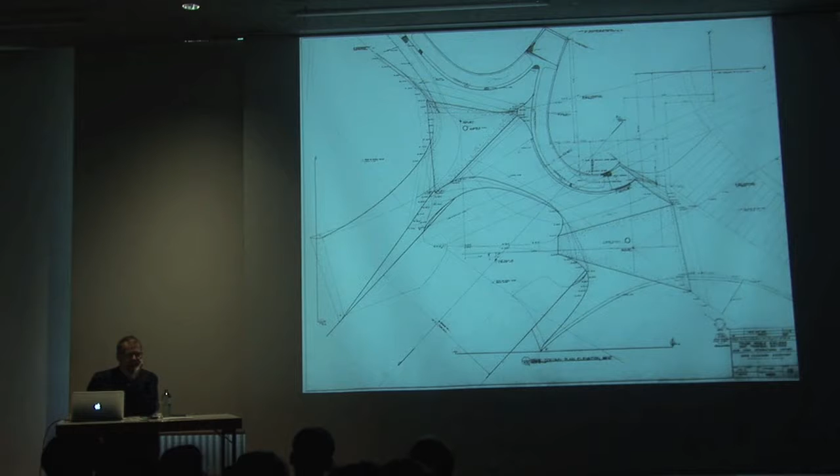So I look at things like this, a drawing by Saarinen and Saarinen's office, and I look at buildings like this and realize this was built the year I was born, all by hand. The drawings that made this building, and the things that went into it, were all drawn by hand. This is very much the world I envisioned myself becoming part of when I was a kid thinking about being an architect.

I'm absolutely gobsmacked—amazed. I don't know how the word gobsmacked translates into German, but just to think that, if you look at the work of Zaha Hadid's office right now, the forms coming out of that office are not too dissimilar to these forms. And the technologies they're using to make them, we're barely getting our heads around. Yet these forms were built in the mid-60s by hand.

Making an entirely different point. But at the same time, I really admired the skill in that.

This building by Toyo, a collaboration between Toyo Ito and Cecil Balmond, is regarded as one of the first digitally fabricated scripted buildings. It was one of the Serpentine pavilions built in London around the turn of the millennium, just before. It claimed to be this great turning point in architecture, that an algorithmic script could be the source of the information that defines the design.

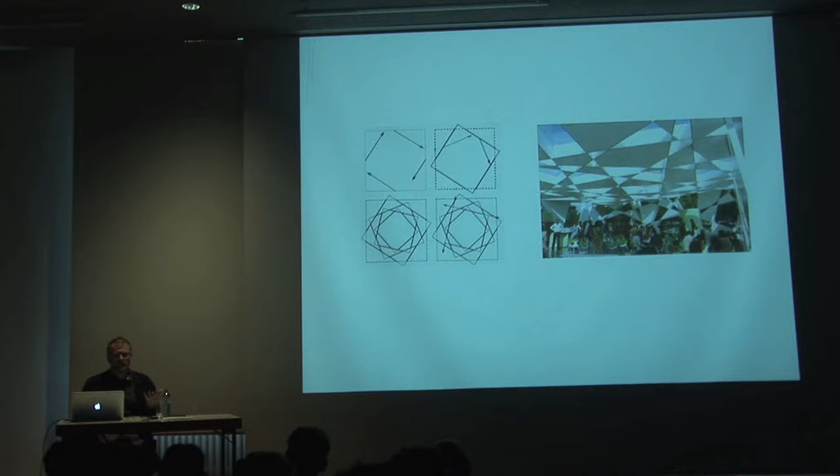That's a conversation which has clearly gathered a lot of momentum, and there's a lot more that's been said about it now. But when I went to look at that building, this is what I saw: it was an analog-made building pretending to be a digitally fabricated one. I know they weren't making explicit claims it was digitally fabricated, but it's very interesting to me as a building. It claimed to be one of the first digitally fabricated buildings, and yet actually it was analog.

I think there's an awful lot going on in architecture always between who's actually on the money, so to speak, between the ideas going into the design and the ideas of how they might be made. Sometimes you're ahead on design, sometimes ahead on making. But I looked at that building and just saw huge mastic joints, square cut steel, all these things that were just part of a mass production industry.

So I've always been interested in the relationship we as designers have with the tools we use to make architecture. Of course, we all know that architects don't make buildings, they make information that makes buildings. But the interesting thing is that simple statement is getting harder and harder to keep contained now. That statement is beginning to bleed apart.

These tools here are in the RIBA drawings collection in London. They're 2,500 years old, and because they're in the collection, they're Roman. It's implied that this is part of the lexicon of what architectural practice is about. These are the tools I had when I was a first-year student, so things didn't really travel very far in 2,500 years in terms of what we used ourselves to produce the things we produce, which is information for buildings to be made.

But what's absolutely revolutionary is what we have today. What we have today is a completely different tool set, which blurs the boundaries between the source of where the information comes from, how it travels into the world of production, how it comes out of that world into the world of prototyping, back into production or design or whatever. It's this fluid set of loops, within simple statements like 'file to factory' that came up to imply we now had this jet stream world between design and fabrication.

I think 'file to factory' is an unhelpful term. I'm much more interested in the cycle, it's a continuous loop. Phil Ayres, Dr. Phil Ayres, who's at the Royal Danish Academy of Fine Arts in Copenhagen, has written a wonderful book called Persistent Modelling. I think it's a very nice idea to think that design is a perpetual form of modeling. We're constantly modeling: the building's a model, the design's a model, the prototype's a model, the next building is a model, and it's this perpetual process.

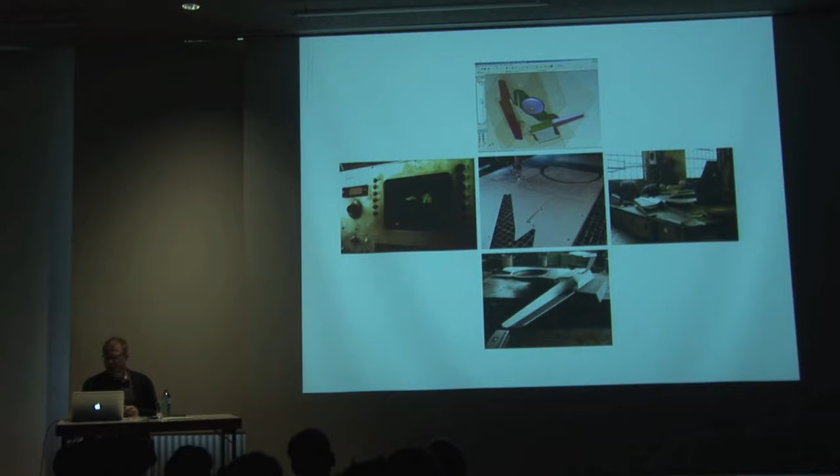I'm fascinated by the way in which the information we use to make representational tools like this is the same information we use to make the full-scale thing.

So this is a structure designed between Tom Heatherwick and Ron Packman, which failed, of course. It was called B of the Bang. There was a big row after it started to fail over who was to blame for the failures, and the manufacturer got the blame for using the wrong steel.

But the thing I like about this image is, looking ahead, I'm really intrigued as to who's that person in the middle of the image. Our relationship with industry is changing, and the type of people populating industry is changing.

One of the things I think will come out of our discipline in the next couple of decades is that we will be inventing 21st century trades. We will be rethinking at a very different level how to educate and develop a population of professionals who can weld, who can do woodwork, who can run the script, who can do what Cecil Balmond does, who can do what Toyo Ito does, and who can organize the delivery of the project. I think there is a very big future ahead of us in this world between manufacturing and design.

So I look upon these kinds of worlds now. This is the factory where we made 5502, where Nick runs his business. To me, it's like a huge drawing board, particularly because of the digital age. I would have used that metaphor maybe 20 years ago as well, but it would have been just a metaphor. I think actually now it really is a drawing board.

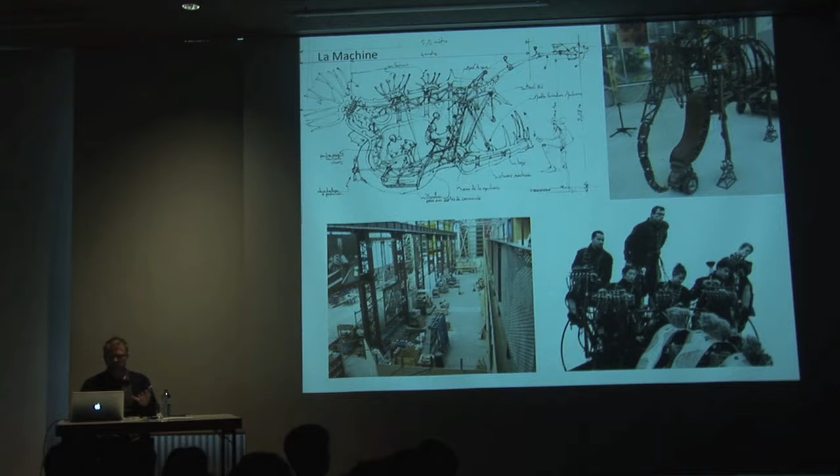So what they've done with La Machine is present themselves as an organization of artists and street performers who also are makers, but they're making the process of making a performance too, which I think is inseparable from this conversation, moving between these domains. And I love that. I think it's great.

I think the other thing, of course, is things like motion capture, in which we impose one reality over another. That's something to think about. And then 3D scanning, which has really preoccupied me in recent years as a provocation to this business of architects making information, not buildings.

So one of the questions that came up this afternoon before this talk was how do my students influence my work? Well, the first thing I should say is everything I do is collaborative, so I don't work on my own anyway in the first instance.

So I work in a group called 16 Makers. That's what we were called when we started. We're not a practice—we're a group of people who come together for certain projects, which are predominantly now research projects. This was the name we came up with when we were students, and we stuck with it. But the point is, we're collaborative.

None of us really ever goes out there and claims solo authorship of anything. Unit 23, which is the studio I'm not teaching at the moment because of my new job at the school, but the unit has always been interested in design and the place of production.

We'll run through a couple of short projects here just to give a bit of context, then I'll move on. This one here is a project by a fifth-year student from Reykjavik, Birger Johnson, known as Biggie. He did some research that revealed...

A lot of these are clearly hypothetical scenarios. Waiting for Requiem was a project by Michelle Young, anticipating the return of the space shuttle to Earth as America's ultimate funeral, in a way—this idea of the space shuttle coming back to planet Earth as a procession and ending up in the Smithsonian Museum in Washington.

Then Jacob Down—Jacob's a professional surfer, so he's funded his education through surfing down in Cornwall, and as a result he's a very physically oriented person. He was interested in architectures that would take the body to physical extremes, and made prototypes that would put a lot of pressure upon the body in extreme positions.

Then this project, which is actually the springboard to the rest of the talk in some ways, was a piece by Tom Svilans—a student who's half Canadian, half Latvian in the school, who now works for us as a teacher. The Bradbury Building is this famous building in Los Angeles, which appears in Blade Runner and lots of other films.

So as this physical artifact in a very ordinary world, if you're driving down LA, you see the Bradbury Building and go, that's the famous building from Blade Runner. This idea that a physical building is known as a prop more than as a physical building played on merging that with other projected realities. So he modeled the entire Bradbury Building in 3D and then, through robotic arm camera movement, invented another film that existed within it.

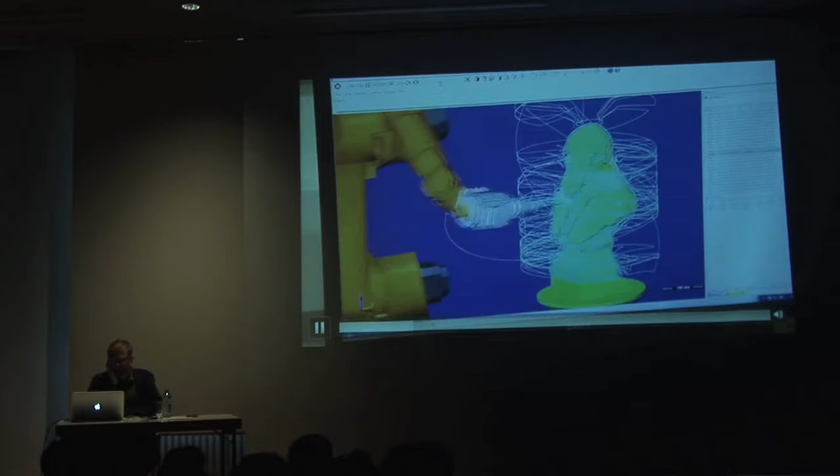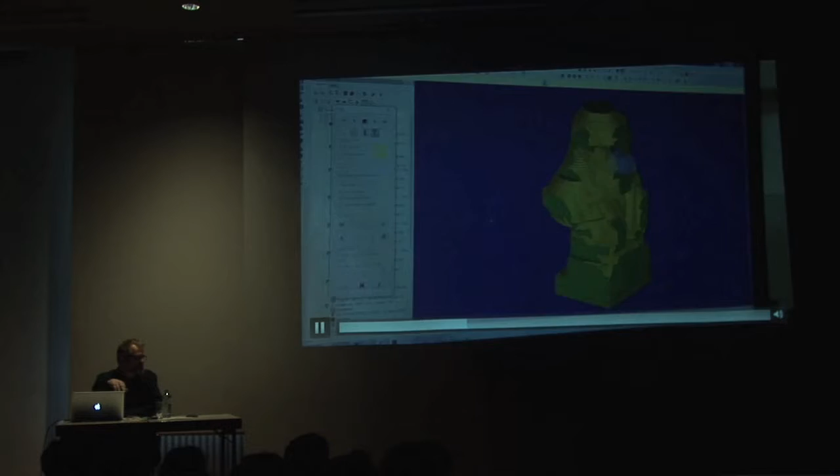All of you will know that you've seen schools of architecture around the world buying robots, and some of you would know why they're doing that, and other people might be asking why. The first thing I want to say is that getting a university to buy you a robot is the first trick. Getting one and what you do with it is the next bit, but getting the university to actually buy you one in the first place took quite a big effort, because in a university like UCL, they look upon things like robots as tools for research.

So the robotic arm has been around since the 1970s. And you just say, we need to buy one. They go, well, are you going to make a new one, or are you going to change robotic arms? What are you going to do to robotic arms? I say, no, if you put a tool like that into the environment where designers are open to what it might be used for, it's a provocation. In our engineering department, they couldn't dream of ever asking for a piece of equipment on that basis. The engineers would always have to say, the research question is this, and the tool we need to do one aspect of that research is this.

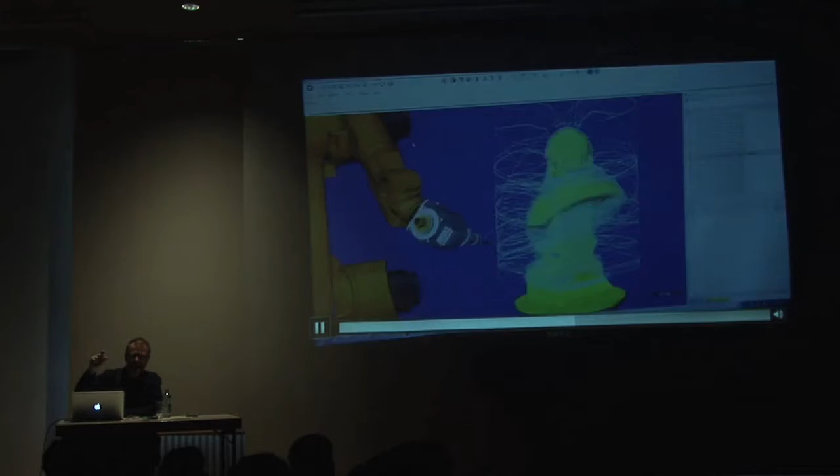We said we don't know what we want to do, but we want this tool in there to shake the system up. This piece is a pure piece of demonstration, no research going on, as we were asked to demonstrate our skills in modeling. The engineering department didn't have a robotic arm because they couldn't think of a research question that could get one. They saw that we had one and said, oh, we need to get a robotic arm. If you can show you can do this, then we can prove a research question.

They scanned this bronze bust of Darwin, and we remodeled it in polystyrene. I'm sure the visually astute amongst you will notice that this film is also being made by a camera on the end of a robotic arm. So this little film demonstrates a few things: one, the architectural workshop got its head around high technology like using robots, and no one got killed. Number two, we understood the journey a design makes into the world of production and becomes a set of tool paths.

The tool path translation is interesting. If you really know what you're doing in that world, you can start to play with tool paths just like a craftsman would play with a tool to shape a piece of material. You can decide to what extent the tool path ought to be revealed in the work. And then you can make the film, which can tag to geometric positions keyed into the work that speak about space away from the artifact.

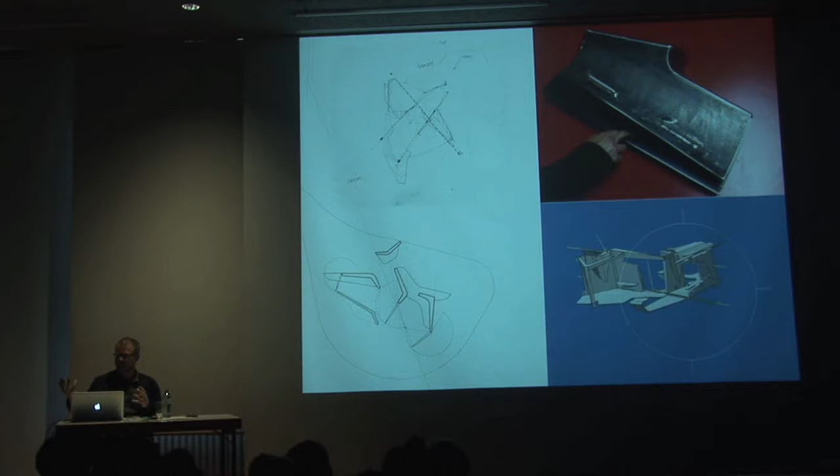We asked anyone interested in joining us on this project to make this object, and then we picked them based on their results. Nick, being a very clever designer and manager, picked the best welder, but not the second best welder as well. He picked the best welder to ensure great welds, but also picked the most experienced member of staff to oversee the entire process - putting experience together with real sharpness. And as this image implies, the building was built as you might build a model - built at full scale, one-to-one.

How we won the competition is a long story, but we were taken on board as the wild card. They asked for pavilions to be built in this forest, and we said, well, we'll go about it a certain way - we're not going to tell you what it's going to be. This is the way we're going to go about it, and that's going to be the story of the project.

But the project took a really interesting twist when, a year later, two students of mine who had got to grips with 3D scanning went up to Kielder to scan it.

So if you take on board the point I've made, this building had no fully resolved design model before it was completed. The design model was incomplete. A 3D scan of it, therefore, is the only complete kind of digital capture of the artifact itself.

Apart from the fact it produces visually tasty images, that was a really interesting moment of pennies dropping, that you can design something in a way we're familiar with from making, but not have to worry about matching the design. Then you can scan it and make comparisons back through the chain of what's different to what got built, to what got designed.

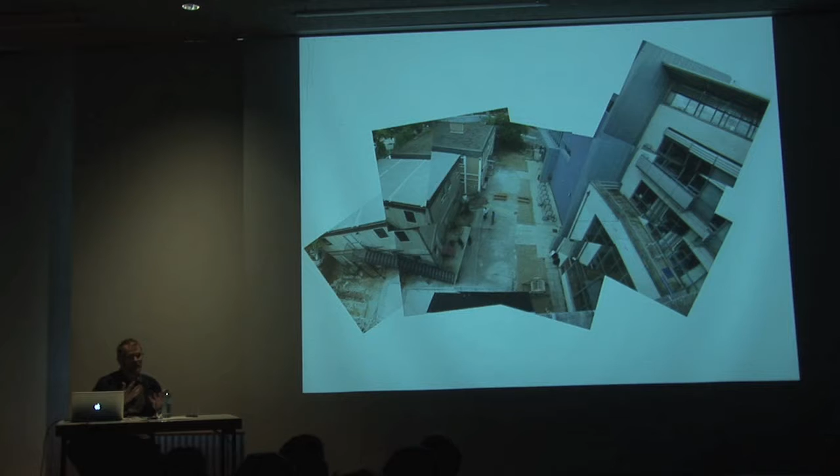The organization on the right-hand side came to me one summer and said, would your students like to build a temporary structure in this space for a conference called Theatre Materials? The budget is about £10,000, and we need it up by late November. They could do it as a simple project, have some fun, because everyone thinks architectural students need to learn how to build things, giving them the chance to build things. Not knowing where that was going to go, I said, yes, let's take that on and see where we go.

The space they asked us to build in, we discovered later, was also used for performance a lot of the time. The minute you get these two worlds together, students will always go off script, which is the great thing about students. So the Bartlett students go off script - you ask them to do one thing, and that's the last thing they're going to do. They came back to the very first presentation for the Central School of Speech and Drama with all sorts of different ideas, which we'll go through now.

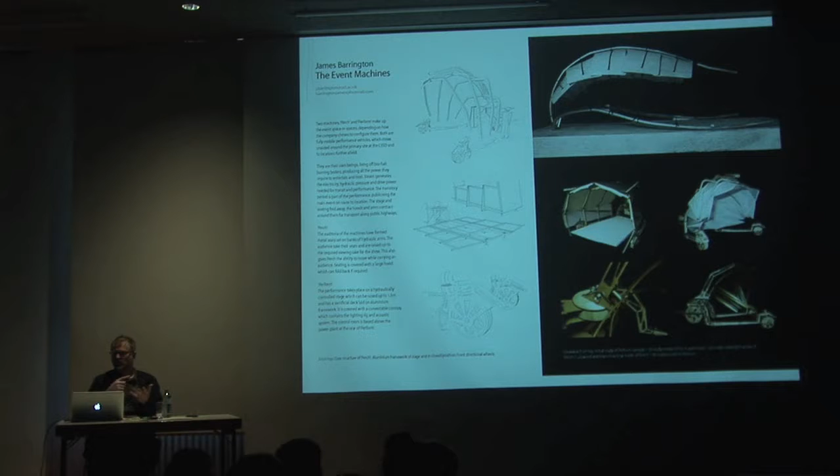James Barrington came back with this idea of these Roman chariots that could be wheeled out, giving you an outdoor gathering space for performance or talks or whatever. So he liked that idea.

Frank Gilks, a real Diller Scofidio fan, was interested in this hinge space, which would have a mirror in the center, where the two spaces of the theatre could face each other, or be hinged. This would be another way of challenging this notion of a temporary space that would itself challenge the conventions of theatre.

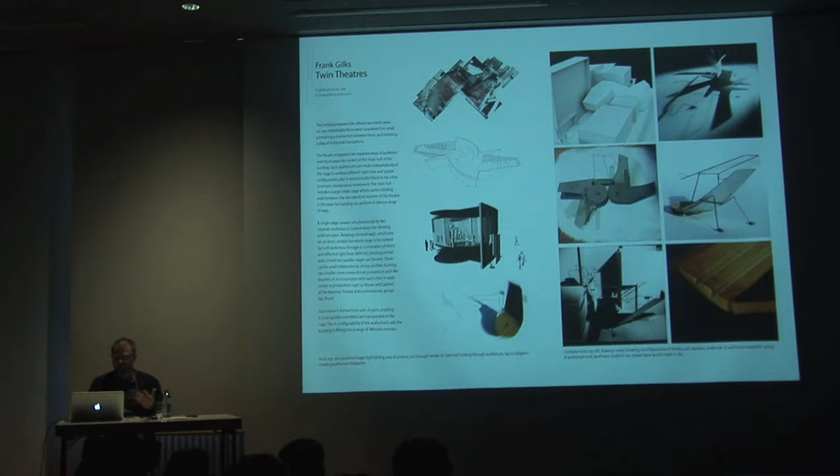Justin Goodyear was interested in parametrics, so he did this malleable skin structure. Ric Lipson, who has a lot of experience in theatre, worked at Stufish, the studio led by Mark Fisher, who's now sadly no longer with us, but they built all the stadia for the Rolling Stones and U2 and other big bands. He did this very vertical theatre.

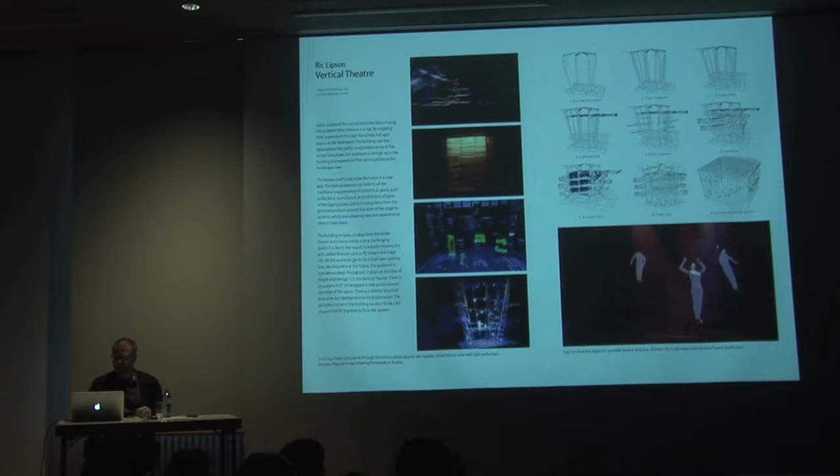Matt Shaw did this floppy space that you could pull into shape with articulated arms. Katrina Varian did this piece called Parasite Performances, which I'll come back to in a moment - her idea was to attach kind of parasites to the building and make new theatre spaces. This was perhaps closest to what they were talking about in the brief.

And instead of building it, when they saw those ideas, to their credit, the Royal School said, okay, forget it. These ideas are far more interesting to develop than to have this thing, spending £10,000 on scaffolding poles and plastic. They gave us the money to push those projects and exhibit them as ideas. So they just squashed into the building anyway and gave us the entire budget, which was meant to give them extra space for a vitrine to exhibit the ideas. And that reinforces the power of ideas to turn a client 180 degrees and say, we're not going to do what we said we're going to do because your ideas are more interesting.

About a year later, we managed to get quite a lot more funding for this project, and I was allowed to hire one of those students to work with me for a year. And we went back to the brief, and we devised a new set of requirements.

In conversation with the client again, the things that they liked about those projects were mobility, other forms of use, adaptability, the bareness of things, the kind of rawness of things. There was no need for a blackout, which is a real convention in theatre, like we have here tonight. Not an absolute requirement. It needed to demonstrate some innovative technical provision. They liked the idea that the making of a theatre could be a theatrical idea in itself. So if you're thinking about La Machine. And then also to produce something which was clearly about the research potential of these two organizations. We're not commercial theatre. They weren't, and we're not a commercial practice.

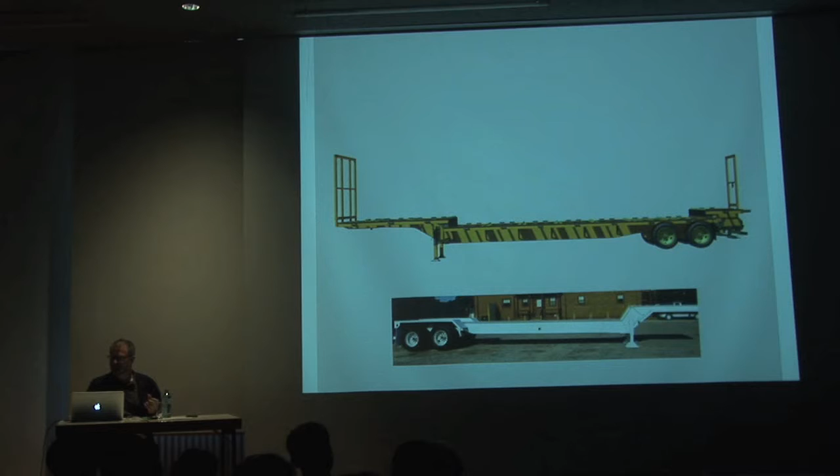So with Matt Shaw on board, we went about a whole new design process and designed the Perform project, which we decided to take as a starting point, a standard articulated trailer as the base for everything else to be designed around. So Matt developed a whole series of configurations of how that articulated trailer could be used for different types of theatrical performance.

He made physical models, part digital, part analog. He played with some of those models. This is a really nice idea for how the articulated truck could open up a structure. So if you're driving along and you're pulling a trailer behind you, the articulated truck could put the brakes on the trailer and then pull the structure apart.

We had also just got our SLS printer at the time, so Matt was very keen to use that. The other little thing we did - we heard we were going to meet one of the funders, sponsors of the Formula One team, the Williams Formula One team. And we heard this guy has got no time at all for email. He's got no time at all for presentations.

He doesn't do boardrooms. When you meet him, you get one minute and that's it. So we made a flip book, which we thought he could put in his pocket. And this demonstrated the idea of the project in less than a minute. So this was a flip book that just went bang. And on the other side, it was showing the relationship between performance. So we did capture his attention, and we got a little bit more money, not a huge amount. But I just share that one with you - if next time you're meeting the leader of a Formula One team, you've only got a minute.

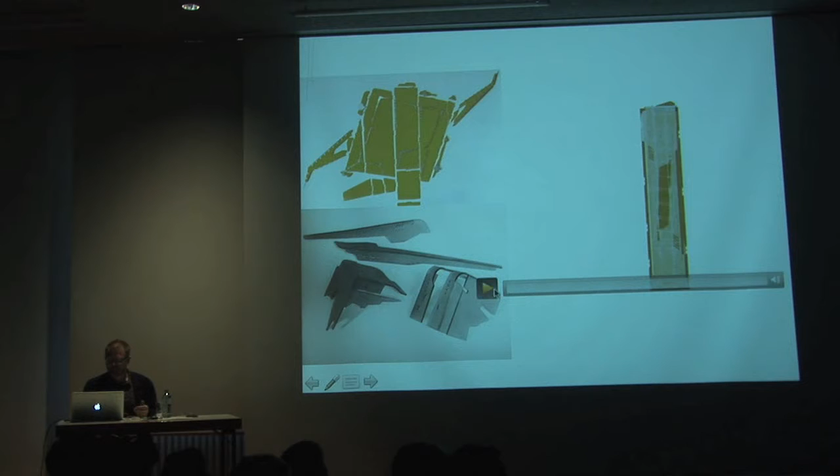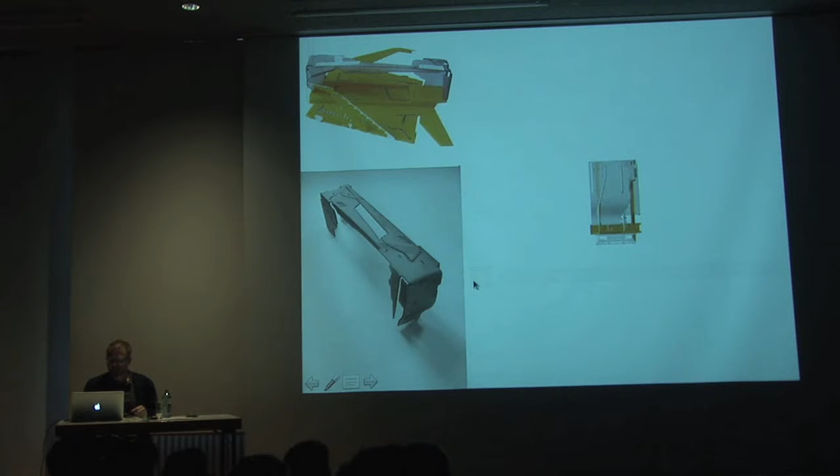Matthew then started to make some really interesting models, which were all articulated to show how it would expand. You could move along the motorway as a compact sort of Swiss Army knife, and then arrive in a space and open up and become this performance space. So we did lots of that.

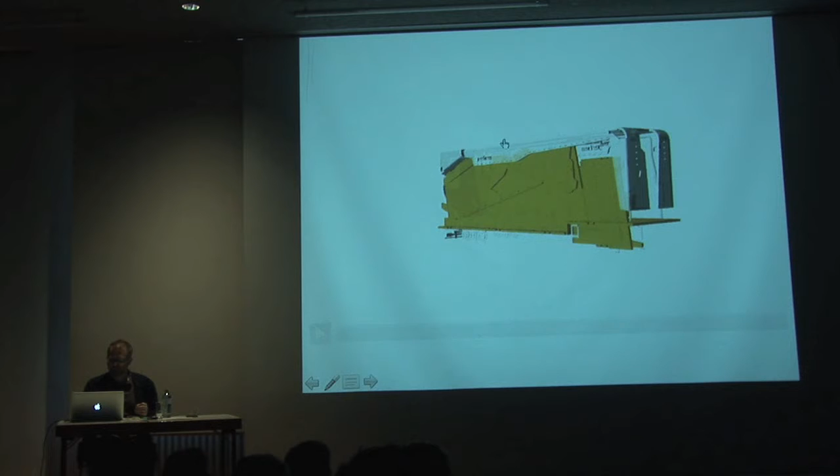I don't want to dwell on this too much because we're going to turn a corner on this project in a second. So that project ended up described as a platform with an armature that would support a skin overhead, and all the parts would be inside the box as it's moving. This is a way of describing it in situ - we had a 3D scan of the quadrangle of the university, and we were demonstrating how this piece could be read in a real-time environment.

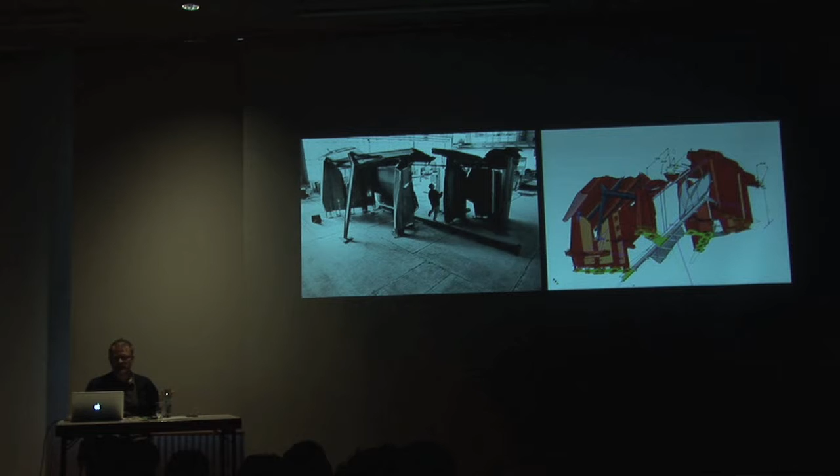So the problem with that project is that's where it ended. This is really where we wanted to get to. We wanted to build something, and that project ended up as a design, which always frustrated us. Going back to the potential we had in this project, this is the sort of stuff Nick makes every day. We felt that although the design had many rich possibilities, it had not engaged with the world of making or manufacturing to the extent that this project had.

So we were thinking about this when another opportunity came along to do one final chapter of that project, just as these images of 5502 were coming together. After we scanned the 5502 project, we started to analyze the differences between the CAD model and the 3D scan.

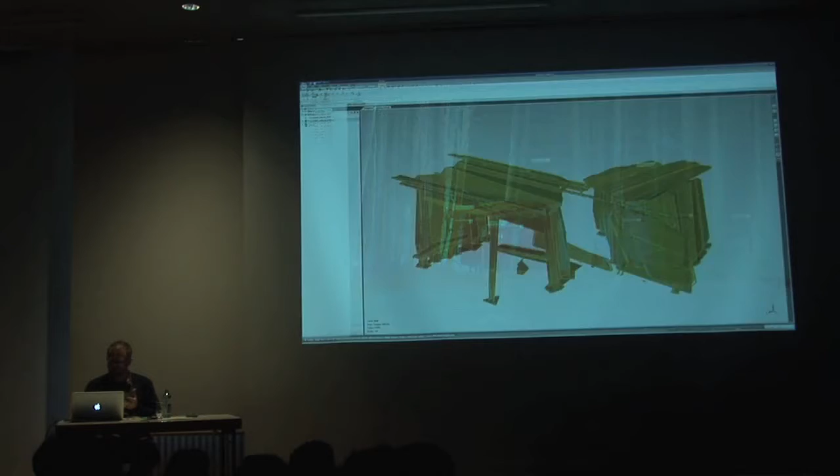Where this model is really green, those two models line up. Where it's white, they don't line up at all. It's clearer in this image here. Now, we're not identifying a fault here. If this was the wing of a Boeing airplane or an Airbus A380, yes, serious problems. But it's interesting that we were starting to identify difference.

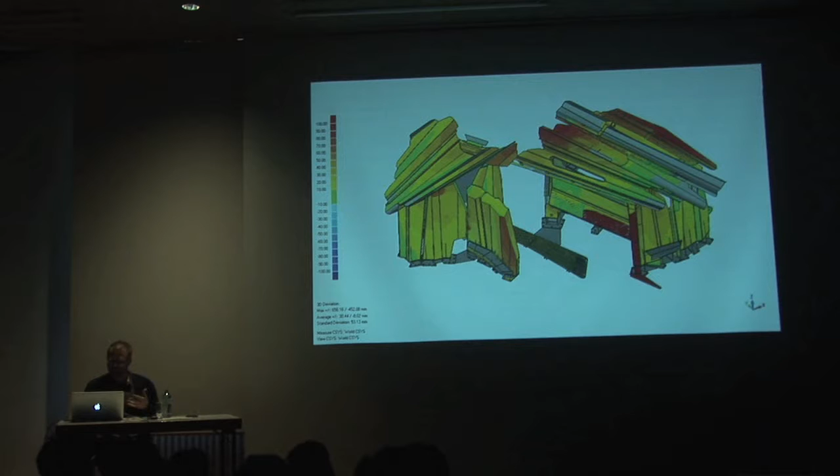So we decided to go back and think about the Perform project in an entirely different way. Some of the things at the back of our minds were the ways in which the physical produces results that the digital can't. So when you're rolling or folding steel, for example, it has a spring in it - getting it to come to the exact curve every time with every single piece of steel, all of which are different, is a fascinating task. Mixing medieval techniques of forging with digital techniques of cutting.

The project which we went on to do, which is the final thing I want to talk about, is called the scan. In many ways, this project reassures me I'm an architect. It's stuff - I can go up and knock it. I designed it, it was built. It's in the forest in the north of England. It got an award, it's in magazines. I get phone calls from my auntie - she goes, congratulations, always wondered what you were going to do. That kind of reassures you you're an architect.

You've built something. But those 3D scans were kind of spooky - they were raising all sorts of other questions. So the event that we ran ended up in this moment here, which was the space behind the stage of the Royal Central School of Speech and Drama, with a saturation of 8 projected films hitting the audience simultaneously.

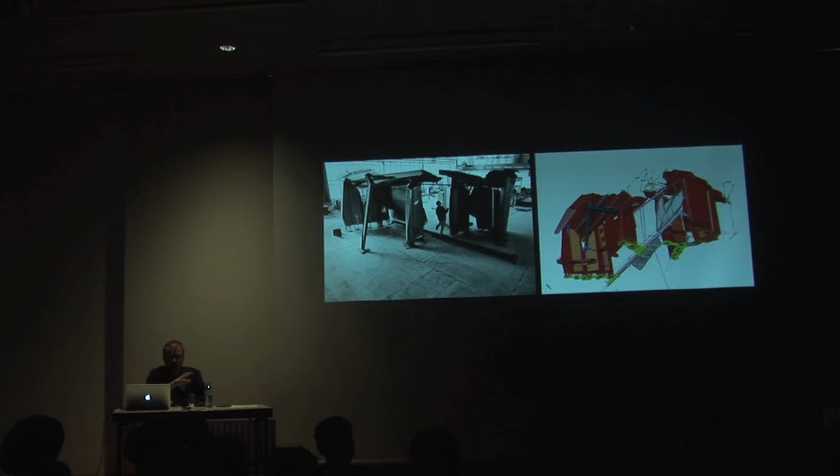Not everyone would agree with me at all, but I just use that image there for a second. I think we predominantly operate between these two images most of the time as architects. We make the stuff on the right-hand side in order for the stuff on the left-hand side to happen.

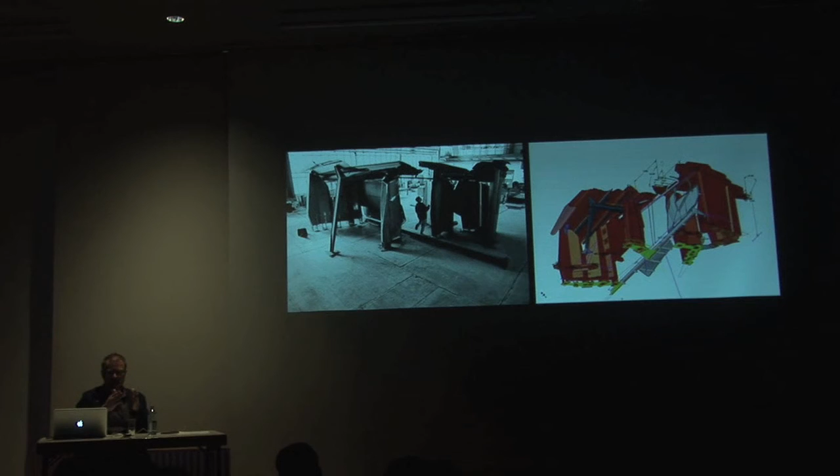But in the past we've always relied on all sorts of other people occupying the world in between, that translated that drawing for us - manufacturers or joiners or craftsmen or builders or engineers, all sorts of other layers were in there between the first drawing done by the designer and the final artifact.

One of the challenges facing us today is that with digital technologies, those two worlds are coming together very, very fast. If you look at it as the glass half full, you'd say that's great - the designer can move across now from the world of making representation to the world of making things, and take ownership of the information all the way through, saying, look, I'm still involved as the designer because I can tag that information at the very least, or I can be the person changing it.

Or there is another view that says the designer could be pushed out, pushed to a tiny amount of time at the very beginning, and another industry takes over, saying thank you very much, you've done your job, now we know how to produce this stuff because all the systems are in place.

So I think the relevance of the projects we're trying to do within tiny budgets is stretching the skill set of the designer, but also stretching the place where they feel they're operating in. On that project with Shunt, I've never felt so out of control on anything in my life as a designer. That was very exciting, actually.